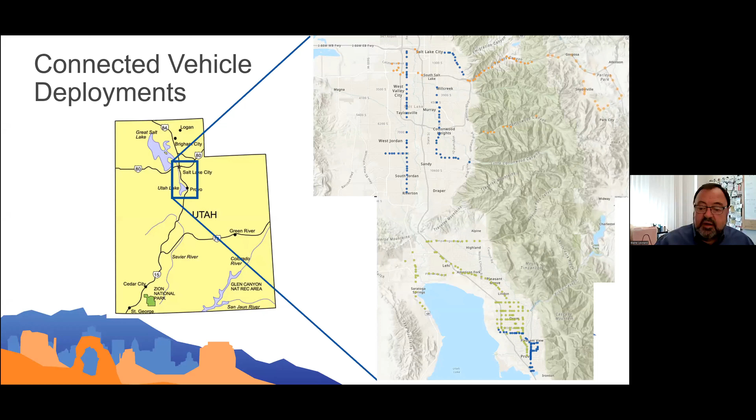So as was noted, we're going to focus today on traffic signal priority and emergency vehicle and snowplow preemption. If you've watched some of our earlier webinars, we've talked a little bit about our connected vehicle deployments in Utah. Here's an overall map that covers most of those. There's a few off the map to the north that I don't show here. We talked about this in some detail on webinar number 1. We've got about 340 roadside units deployed in about 270 vehicles.

As we've noted in earlier webinars, specifically webinar number 3, we started with transit signal priority. We didn't say, hey, let's do transit signal priority, how do we do it. We said we want to deploy connected vehicles, we want to be ready for the vehicles that are coming from the automakers. Let's deploy something - how do we make it useful to us in the short term? Transit signal priority was that feature, and so partnering with the Utah Transit Authority, that's what we built. The application was more straightforward than some, so we sometimes called it low-hanging fruit, but it also gave us some good short-term benefits, which enabled us to justify the expenditures and investment we were making.

Later today, Michael Sheffield will talk about some of the performance benefits and also the challenges with measuring those benefits with the data that we get from our connected vehicle system. We then expanded those deployments, and you see a bunch of other blue dots, corridors on this map where we expanded largely with both TSP and snowplow preemption. And again, we attempted to measure those benefits.

A not very scientific benefit was recently brought to our attention this past winter. On the very bottom of your screen, you see some blue dots that represent a corridor traveled by a bus rapid transit line. We had a very heavy winter in Utah with a lot of snow, and UDOT snowplow crews were incredibly busy trying to keep up with all the snow. We got record levels of snow. At one point, the preemption system along that blue corridor stopped working, and we heard about it through the region leadership there, so we jumped into a scurry mode very quickly to get that back up online, figured out what the problem was, and got it up and running.

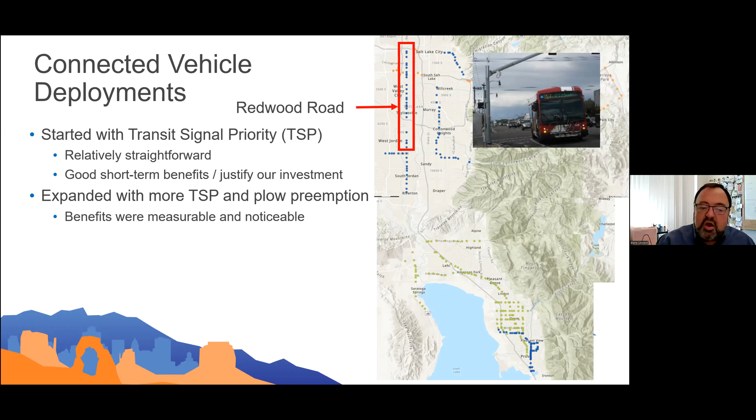Now, I realize that's just one data point and a bit apocryphal, and we wouldn't see that kind of benefit on every corridor, but measurable benefit is there for plow preemption on these corridors. And that kind of feedback allowed us to move forward.

And so we will talk more today about how we did those deployments. Renee, Philipp will discuss our efforts in expanding the use of data to evaluate bus idle times and fuel usage.

We'll again hear from Michael Sheffield about the data from that Route 850 and what we learned from that data. Hal Johnson from UTA will talk to us about their perspective of this priority system and how they plan to move forward.

Jonny Turner will talk a lot about the details of how this deployment is done. And I don't use the word details lightly. He's going to get into some details.

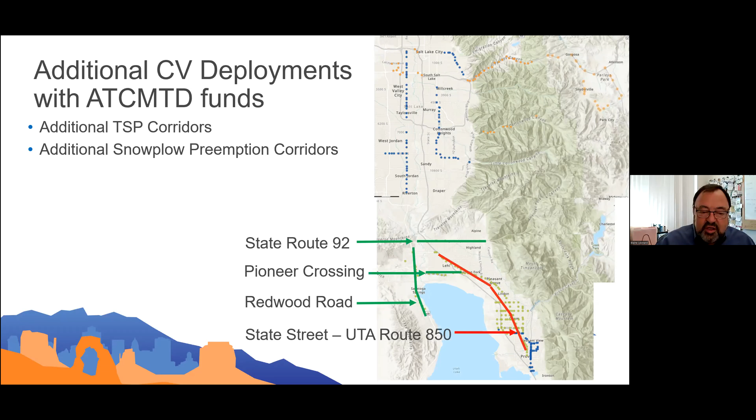And so those of you who are yearning for some details on the nitty-gritty things that are required to make this work, you'll enjoy that presentation.

We also had some additional technical capabilities added to our system as we worked through these deployments with these ATC-MTD funds. Security credentials, which I'll talk about here in just a minute briefly.

The integration of our data into Cirrus, which was discussed on webinar 2 largely, and the development of the RTCM message, which allows the GPS to be corrected. And Jonny will talk about some of that detail.

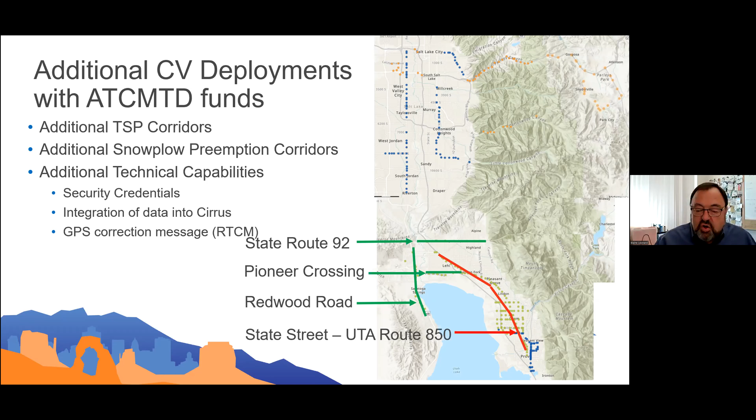And so we got a lot of benefit from these additional deployments. Messages through a connected vehicle system are transmitted in open air from an RSU or an OBU that's there, and

they're just broadcast broadly to any other compatible radio, RSU or OBU, that's there to listen to it. It doesn't go through a cell tower, as you know. It doesn't go through any kind of a central tower. It's an ad hoc message.

We call it sidelink, and it's there just radio to radio. There is a way of securing those transmissions, and during this set of deployments, that's what we started to do, was use digital security certificates to allow these messages to be transmitted securely.

We have three things that come out of this deployment of security certificates: message authenticity, making sure that the messages are only coming from trustworthy sources, and when you receive them, you can verify that.

Message authorization, which means that the message you're getting can only do certain authorized things, and message integrity, meaning that the message wasn't modified en route while it was being broadcast. So that's really important to us to make sure that our system has integrity.

We've attempted to follow national standards as we've done this. The primary standard that dictates these kinds of security credentials are IEEE 1609.2. That's the Institute of Electrical and Electronics Engineers standard 1609.2.

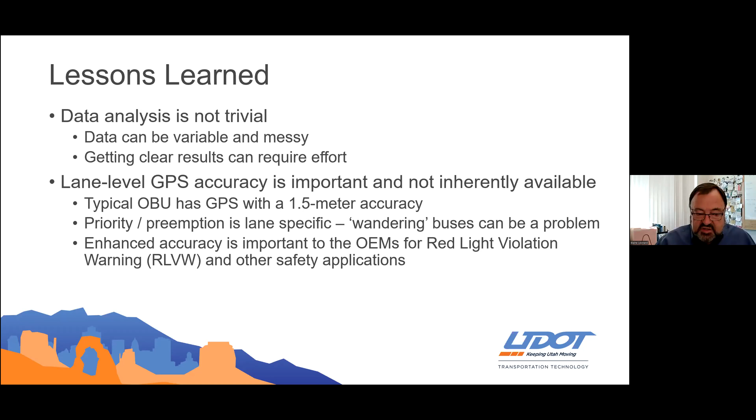Accuracy is even more important when we start looking at safety applications like red light violation warning and other things the automakers are working on. Jonny will talk about one of the solutions we've developed to the GPS accuracy issue using what we call an RTCM correction message. That's a lesson we've learned as we've worked on this.

Probably the biggest lesson for me as we've developed this system has been that, in a word, we end up with a TSP system that belongs to two different owners. I probably should explain that a little bit. The V2X system we deploy has been developed, engineered, deployed and is maintained by a certain group of people in our group here at the Utah Department of Transportation.

Traffic signals are operated and maintained by another group, by somebody down the hall and all of their maintenance people. We work together really well, with good cooperation, but our systems rely on each other, particularly the V2X system providing signal priority and preemption, which relies heavily on the traffic signal controllers.

When something doesn't work quite right, it's not just one team that has to look at it, it's two teams. Sometimes both teams say our part of the system is working fine, when in fact there's some little nuance that neither one of them sees until both teams sort of mesh together.

Our signal operations aren't really impaired by our implementation of V2X, but sometimes V2X can be impaired by the way we implement signal operations. We've had a lot of discussion about that, and it rolls into how we monitor and maintain this system over the longer term.

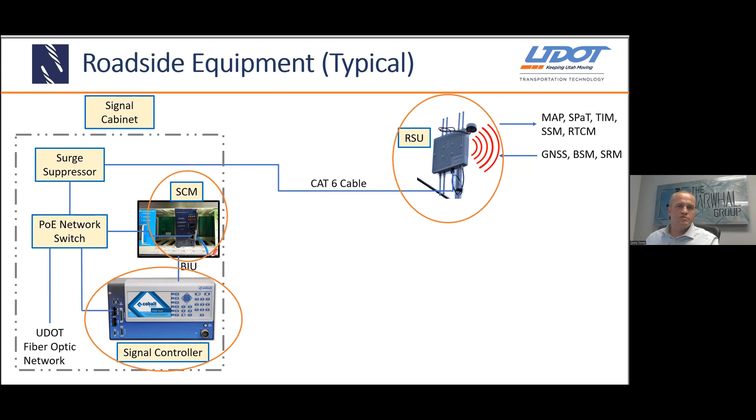So the physical installation of the RSU, we'll begin with it. We use some sort of standoff mount. In the case of the horizontal standoff mount, the purpose is to limit any interference from the luminaire extension to make sure we can get good wave propagation and coverage area of the RSU. In the case of the Astro-Brac, that's when we need to mount to a mast arm, typically due to overhead utility conflicts or places where there isn't a luminaire extension.

Within the RSU, there's a lot of configuration, and I struggled trying to share what configuration elements you need to know about. It starts from as simple as basic networking configuration, like you can see in this network configuration screen, but it extends through IFM message forwarding and SNMP and setting up store and repeat messages for things like TIM. The big takeaway I'd like to encourage here is to establish a really good relationship with your RSU vendor to get support, because it's almost impossible to write a comprehensive guideline on how to work with all RSUs. Each one's slightly different. For some, you may take it out of the box and the IFM may work just out of the box, while others you have to go in and turn everything on.

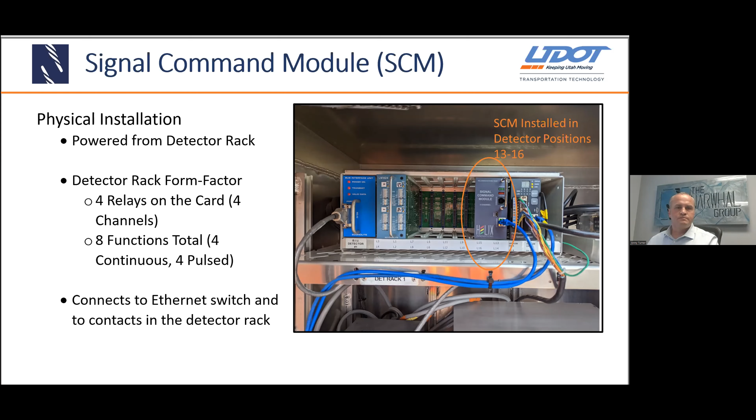So that's just kind of some of the configuration elements of the SCM. We'll step through these kind of quickly. You can rewatch the webinar if you want to get some more detail.

The first thing that we do is upload a map message, and in webinar 3, Chuck Felice covered a lot about map creation. We can support either the FHWA mapping tool or an Nmap file. That's the first thing we typically do, is we upload the map once it's created, and then we go through the configuration screen of the SCM.

We set up the network configuration, IP, subnet, gateway, the typical things, the SNMP user information for the RSU so the SCM can communicate with the RSU, and then set up the traffic signal controller information. What IP, for example, that we're getting the TSCBM, which is the traffic signal controller Battelle message, which we use to create the SPAT message in the SCM that gets forwarded to the RSU.

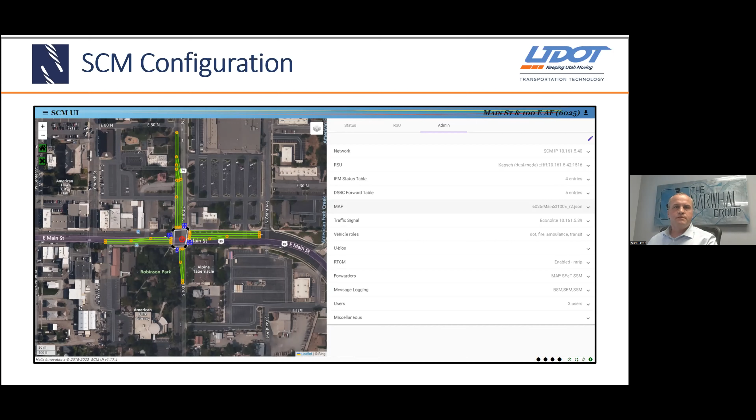One of the other primary items that we do within the SCM is that we set up the lanes and the vehicle roles for priority and preemption.

It's kind of hard to see, but you can see the different vehicle roles: DOT, fire, ambulance, transit. Within each vehicle role, we make assignments for the privileges that they have on a lane-by-lane basis. So for example, you can see that lane number 2 has a pulsed output, which is what we use for priority, and it's going to operate relay number 4.

And then that can be mapped clear through to the controller, and it can recognize, okay, when I see a pulsed input come in on relay 4, then I can implement TSP. And we'll talk about that, or I'll cover that here in just a moment as well.

So this is really kind of the critical element of making sure that the controller can be programmed, and it's really that tie between the RSU and the controller to make the operation work, and it's where the application's running.

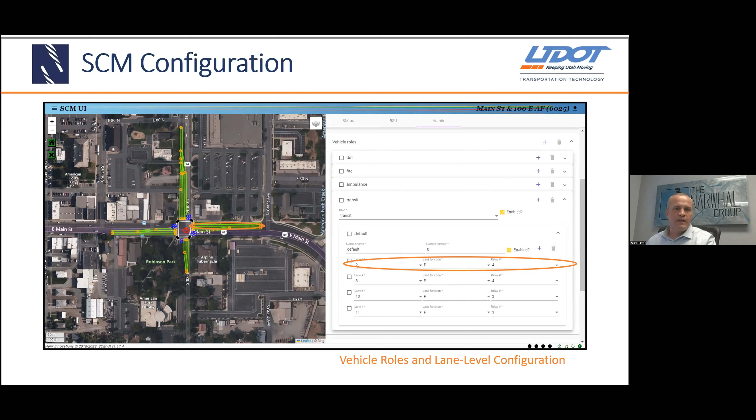One thing to know, as Blaine mentioned about the GPS drift, what we'll do common times is we'll assign all the lanes in one approach to help overcome some of those issues that we see when we see a vehicle drop out of the lane, because when it leaves the lane, it will cancel the request because it's not in the lane anymore. So we'll map all those approaches to help mitigate any GPS drift when we don't have corrections running.

Once the SCM's set up, then you can use the screen to do some data validation. You can see what's happening with SPAT, that you're getting all those TSCBM messages being created, and that you're generating SPAT and sending that out to the RSU. You can see the map message, and you can also see requests that are being made within the map boundary and the vehicles as they traverse the intersections.

In addition to that, you can see some of the other messages, and there's log files and different menus where you can see the BSM messages, the SRMs, SSMs. And you can also see on that screen that we've got RTCM messages that are going out, and we'll talk about that in a little bit.

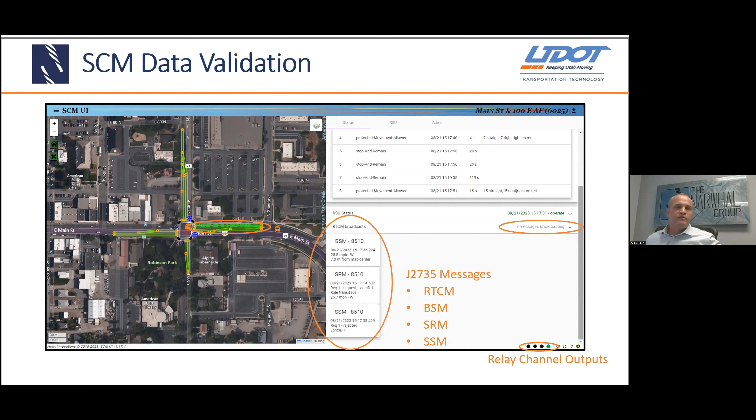And then also the relay channel outputs, so you can see in real time what relays are being commanded to the controller. That's super helpful for signal techs to know, okay, I can see these inputs going into the controller, they're live, am I seeing them, am I not seeing them? Sometimes we end up troubleshooting issues with the detector rack where, for whatever reason, an input's not working quite correctly.

So next we'll talk about the traffic signal controller. As part of this project, we didn't go out and replace all of the traffic signal controllers to get the latest, greatest, most connected vehicle supported signal controllers available on the market. There's some movement happening there, but there's thousands of controllers in the UDOT and state of Utah system, and it just didn't make sense to swap out controllers for some that may have some of those capabilities.

So like I mentioned before, UDOT and most of the other stakeholders use the NEMA TS2 style signal controller. And so there's a picture of a typical cabinet and the front panel menu of signal controller.

That's an Econolite Cobalt intersection, and there's both that and a max time view where we turn on the TSCBM. So like I mentioned before, with the RSUs, they all kind of vary. The same holds true with signal controllers. So when we go in and turn on the TSCBM, it's different for Econolite than it is for Intelight, and my anticipation is that it would be different for lots of different intersections.

Fortunately, Econolite and Intelight both support the TSCBM messages. There's some deficiencies there, and we're working through those, but they're available for us to use to generate SPAT.

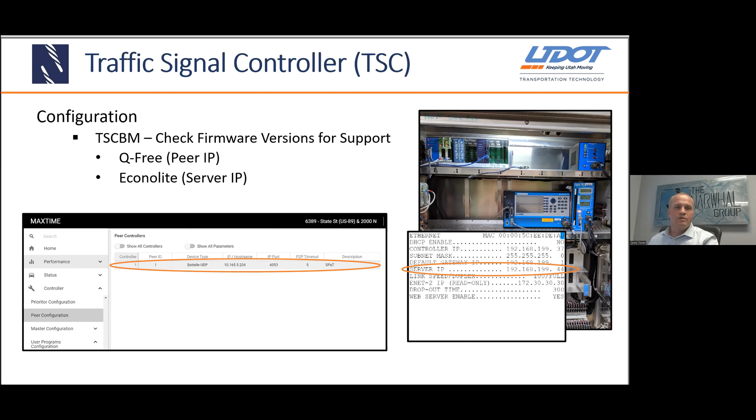And then in the case of max time, we enter those values. You can see that it says Battelle UDP, and that's what we use for SPAT, and that's built in, but you need to check the firmware versions of the signal controllers that you're using. If you're using older firmware versions, it's likely that you'll need to upgrade to a later firmware in order to be able to leverage using the TSCBM.

So additional programming that's necessary within the traffic signal controller consists of the detection and logic statements as well. Here's the screen in the Q-free max time controller where you can see the statements that have been made in the controller.

The variables are set, and you can see that in this case we have a pulsed input priority call going in on the very first line, statement number 1, and it's related to statements 13 and 14 where the TSP request and cancels are made. And so these logic statements are necessary in order to make the priority work in the existing UDOT environment through the use of the SCM.

Similarly, there's the configuration shown here for preemption. And so you can see that statement 2 is where we detect the values of preemption calls coming in, and then that correlates to statement 9 as well. So that's the Q-free setup.

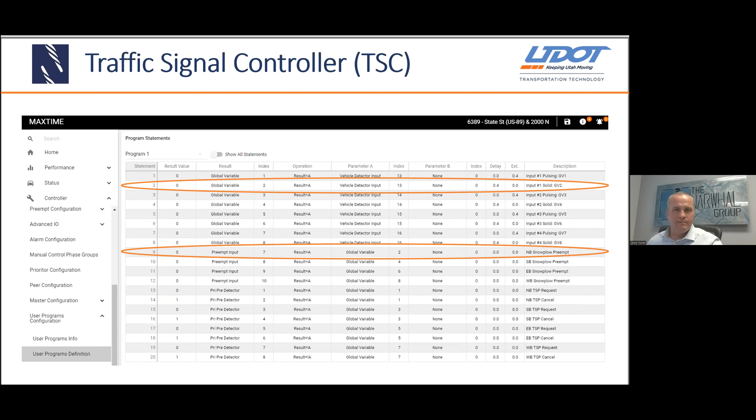The Econolite's kind of similar. If you're familiar with the Econolite front end, here's the walkthrough of it with its logic statements for both priority and preemption. And what's happening here is shown in the bottom right-hand corner.

So the first thing that happens when a vehicle goes into an intersection, whether it's a bus or a plow or emergency vehicle, is that call goes in, and it actually shows up initially as a pulsed input. First and foremost, even a solid input shows up as being interpreted by the controller as pulsed, and it has some wait values in here.

And so it takes 0.5 of a second for a preempt actually to occur. It immediately goes into priority and takes 0.5 of a second to go into preemption. And then when a call leaves or a cancel message is sent, it will take 0.4 of a second before the controller will actually fall out. So that's what you can see through that bottom right-hand corner of what's happening at the controller level.

So I know that's a lot. Hopefully that makes more sense to the traffic signal engineers and technicians on how to set that up. You may need to watch through that a couple of times, and there's some more nuances there and some, honestly, timing preferences that also depend on how you like to implement things, but there's some flexibility there.

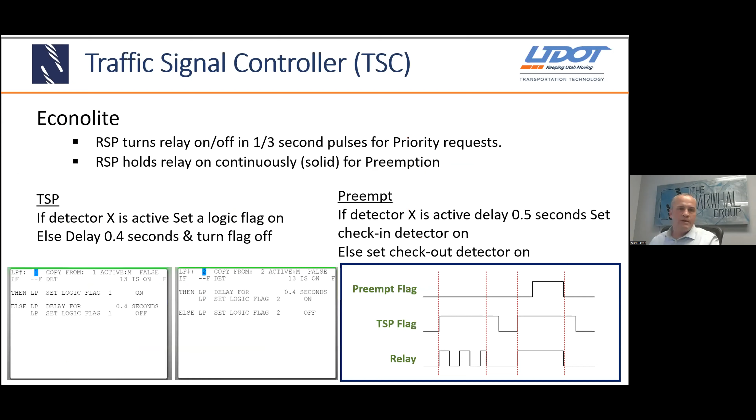Next, we'll jump to the onboard. So the onboard for the bus consists of the OBU, the onboard processor, the connection to the CAN, and the bus network. So like Blaine mentioned before, when it comes to certificate management, you have to have a connection to the internet. So in the case of the buses, there is a network connection to the internet that we can do over-the-air updates of the software or firmware on the OBU and OBP, and also we can do certificate top-off.

So that's kind of nice. We don't have to have a separate cellular connection—it was already available on the bus that we could leverage, and we have the ability to manage the OBU and OBP that way without any additional costs. So the physical installation of the OBU and the OBP, they go in the communications cabinet in the bus. Most transit vehicles have something like this, and it's readily available.

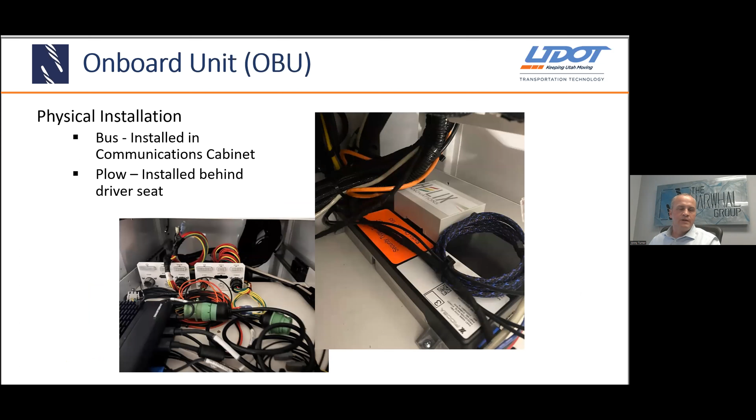Honestly, the configuration on board the vehicle is pretty straightforward and fairly simple in comparison to the roadside elements. And then, as Blaine mentioned before, we have the snowplow. For preemption purposes, this goes behind a seat.

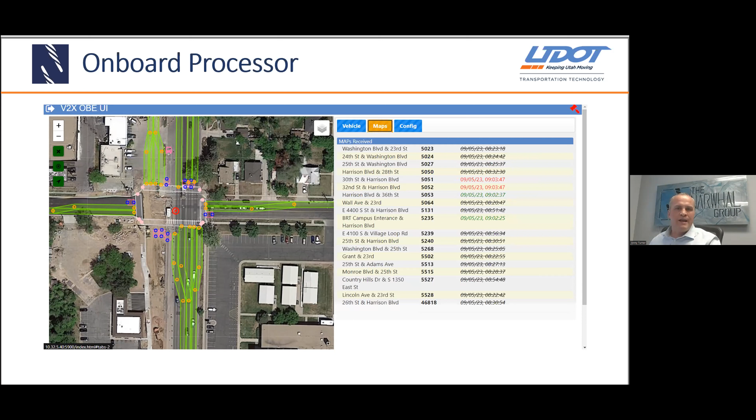This screen is just a visualization. On the left-hand side, this is what the screen looks like when it's received a map message, and you can see all the ingress and egress lanes, and the vehicle will place itself on that. In addition to that, it keeps a running list of the active maps, and they age out after a while, but it holds on to them for a little bit.

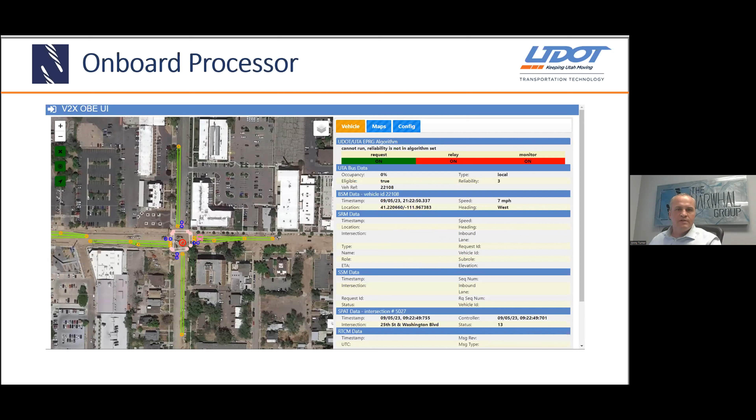Here's another display of the V2X display user interface, where you can see the bus data coming in, the BSM data going out, and the SPAT information being received. And then when a request is happening, the SRM and SSM fields are populated, as well as RTCM when RTCM is coming in. So you can see here the different values that are available in the vehicle itself.

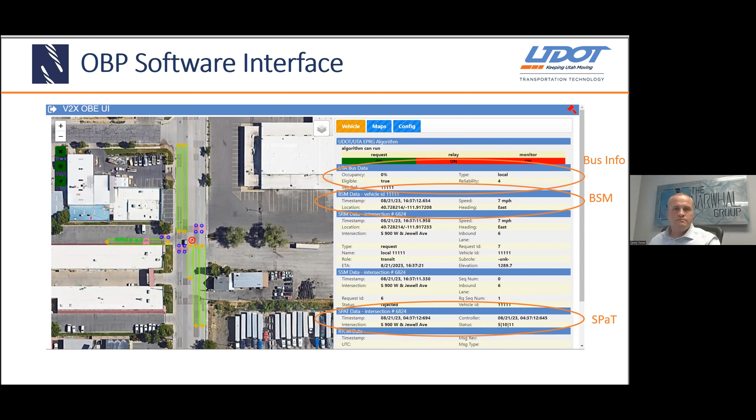Next up, we're going to talk about the RTCM correction. So as Blaine mentioned, the accuracy of the onboard OBUs is fine under some circumstances and for certain applications, but lacks in some others. So we took a couple of approaches.

We started off by going to the Utah Geospatial Resource Center. They already have an NTRIP server that's used for surveying purposes. So land engineers and land surveyors subscribe to this service to get RTCM corrections through their NTRIP server. There's some benefits about this system in that it doesn't require you to go out and set up a dedicated base station, and it leverages a whole network of base stations. So not only does it provide some failover benefits, but it can use a virtual reference station. So when you provide an actual GPS or GNSS coordinate of your location, it uses math and algorithms to determine, based on where you specifically are, using a mesh of base stations to give you your corrections.

One of the things it does require is a network connection to this service, and it's again based on a surveyor's type system. So it may have different outages when you think about it in the environment of connected vehicles, and for safety applications, when firmware or software updates occur for it, there's a need for a backup or a way to cover things. The other part is that it may not be scalable the way it is once you start talking hundreds or thousands of connections to it.

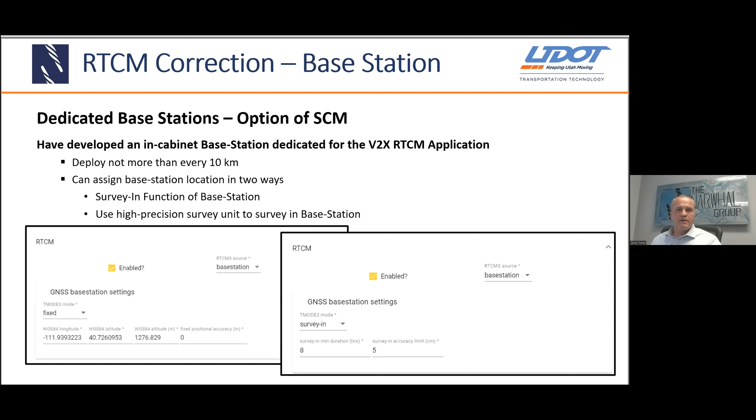This provides us a way to easily manage the GNSS, and we can deploy the OBP and on-vehicle equipment and get greater accuracy, and really validate whether this can be done in a connected vehicle environment. I believe we're one of the first ones in the country to have done this successfully. I'll caveat that we're using RTCM 3.2 because that's what the current NTRIP server supports, so we've standardized on that platform.

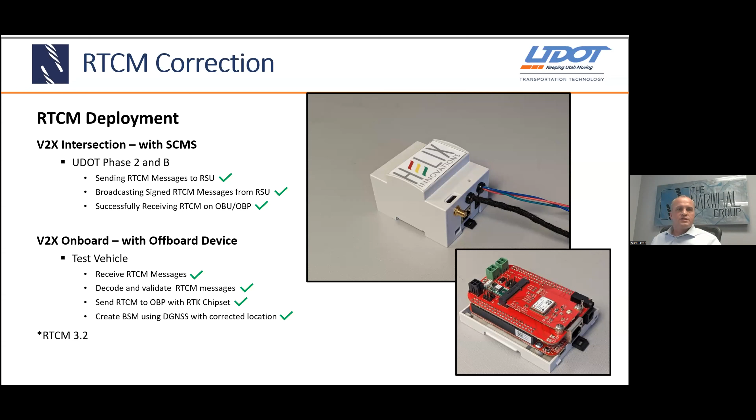Just to provide some background as we go through this validation of the GNSS, this is using a tool made by uBlox called uCenter, where we can see the different satellites in the sky, and we can make an NTRIP connection.

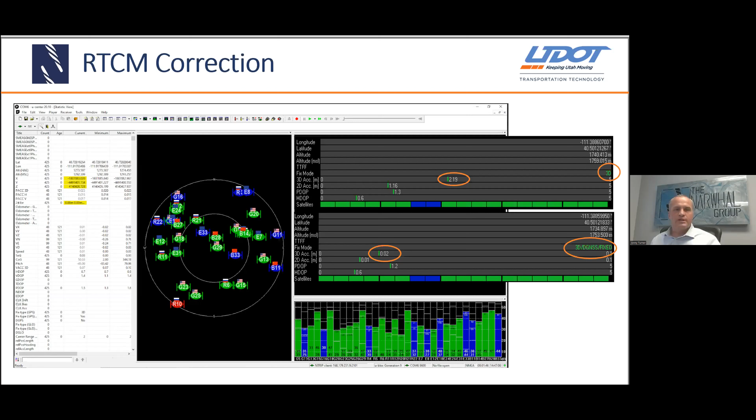You can almost make it out at the bottom - we have a connection to the NTRIP server. To give some idea, this shows a 2.2 meter accuracy at the top, and once we have that NTRIP connection, we're down to 0.02 meter accuracy, which is 2 centimeters. It shows we have DGNSS, the differential GNSS, with a fixed connection - those are some of the elements of the correction.

I know there's a lot of content there. You're welcome to watch the webinar again or reach out to me with any questions. Appreciate it, thank you.

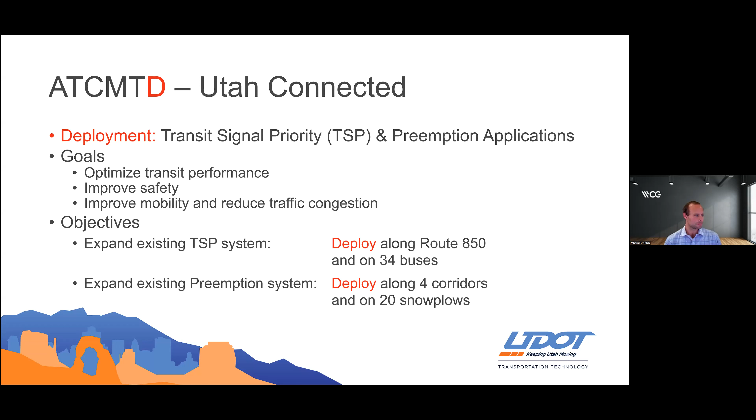So for Route 850, just a little background: it's about 18.5 miles long. It travels along one of the primary major arterials in the area, and it's an alternative north-south route to the adjacent parallel interstate, I-15. It can be quite congested, have lots of traffic. The AADT along Route 850 varies from 15,000 all the way up to 50,000, so quite a bit of traffic and movement there. The bus route operates at 15-minute headways, about 62 trips per direction per day, and the average daily ridership is about 2,400.

With the snowplow preemption, in total it's about 31 additional miles with these high priority corridors targeted. These are some of the heaviest traveled, highest volume roads in the area, and these were the ones that the UDOT maintenance team identified as priorities.

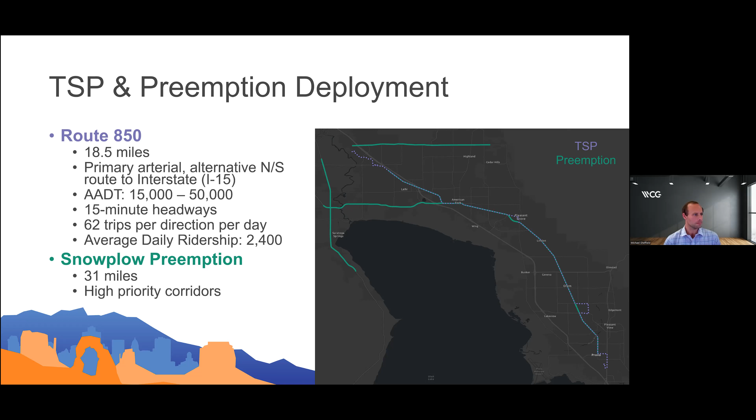With preemption, it's a little different in how that gets enabled and set up with the signal controller and at the intersection. With TSP, transit signal priority, it's a little bit different, and it has to be decided how much green time can be allowed when TSP is requested and served. So UDOT developed a guidebook, some guidelines for how to do this.

In the past, there was a lot of manual effort. It was really subjective, but these guidelines help the signal engineers do this in a way that isn't quite so time consuming and helps them in this process. It's important to note, however, that this is a guideline to support engineering judgment when implementing TSP. This isn't a UDOT policy, this isn't what has to be done. This is just a way to help the signal engineer.

The goal is to provide as much green time as possible to these buses. We recognize the importance they have in the transportation network, and how if they can improve their performance, their travel time and their schedule adherence, they'll become more attractive alternatives. So we want to provide as much green time as possible, but be careful so that the conflicting phases, the ones where green time is taken from to provide the bus, are able to recover within a few cycles.

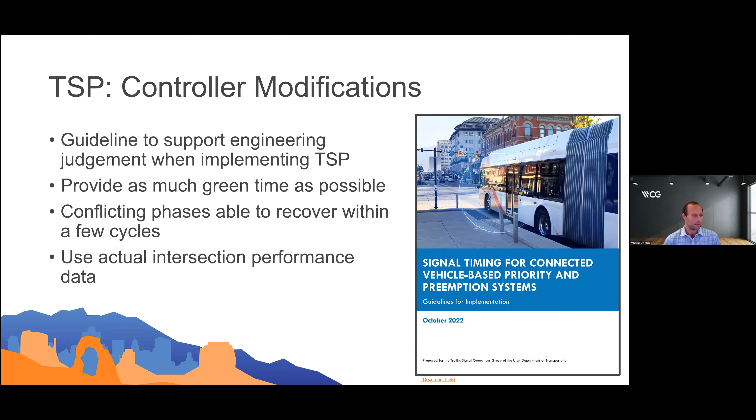So we turn to the ATSPM split monitor report, the automated traffic signal performance measures. This split monitor report was used partly because it's available at nearly all intersections where we have the detection and have that integrated.

Also, that split monitor report summarizes why phases end. Do they force off, meaning there's so much demand that it finally gets to a point where they have to force it off and go to the next phase? Does it gap out, meaning there's a lull in demand and it does not need the entire time programmed in the controller? Or does it skip, maybe there are no vehicles, often seen in left turn lanes, where if there aren't vehicles in that lane, there's no need to give it the green arrow.

So the data that went into this process was from the existing timing plans, the split time and the min time, meaning the min green plus yellow plus red. And then from the split monitor report, these remaining 5 values were obtained: the 85th and 50th percentile splits, meaning how long did the phase last and what was the 85th percentile of that duration, and then the percentage of time that a given phase was forced off, gapped out, or skipped, and the split time, the duration of each phase.

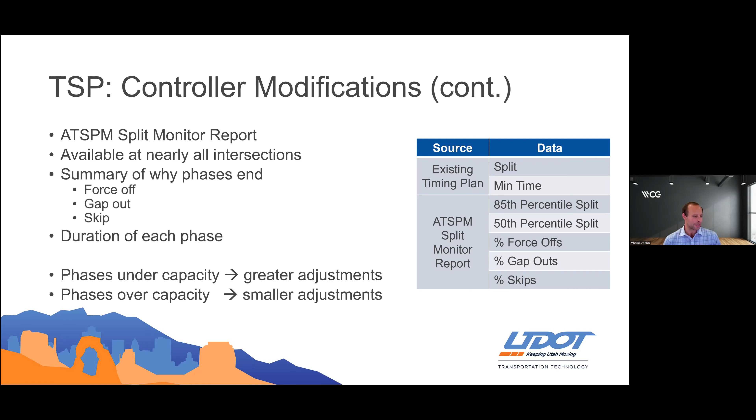We're going to walk through a decision tree that helps us calculate exactly how much time is recommended for TSP. A couple of definitions: TSP max means the max amount of time that a phase can be shortened when serving TSP. The acronym PS you'll see as program split, and then min time is the minimum green plus yellow plus red for each phase.

So starting on the left, is it okay to modify signal timing at this intersection? Yes or no? There are cases where we may not want to modify timing, maybe an intersection off-ramp. A backup of a queue is acceptable, of course, but if that queue is backing up onto the main line of the freeway, caution should be observed.

But if it is okay to modify signal timing at an intersection, you collect the data from the split monitor report and other sources, and then the question is, are skips greater than 70%? In other words, is the phase being skipped 70% or more? If yes, then it's basically the maximum possible, and you take the phase split, the program split minus the min time, and that is how much this phase is recommended to be shortened.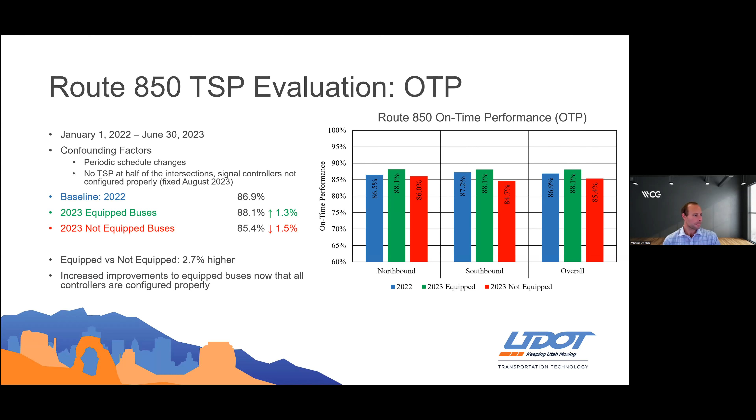Now, when we look at travel time, this is the total route travel time, so from when a bus begins to when it ends. On average, this is the chart that shows the comparison versus northbound, southbound, and then overall.

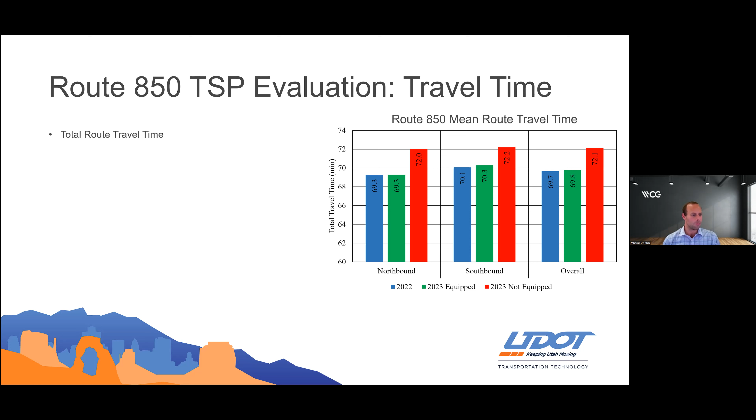Here it's even more important to recognize the difference in 2023 between the equipped and not equipped, having that control group. If you just look at 2022 versus 2023 equipped, the blue versus the green, you see an increase of 0.1 minutes, about 6 seconds in total travel time.

That may not be the expected or meaningful benefit. But there was obviously something inherently different in 2023. Maybe increased ridership, increased congestion, or something else caused the total travel time to be worse, which is readily apparent with these not equipped buses. It's a 2.5 minute difference.

Directly comparing the equipped and not equipped, the equipped buses were 2.4 minutes faster. So that's quite a bit. As a rider on transit, a passenger, that adds up, and is certainly a meaningful improvement.

Again, we expect this travel time to improve, especially as the percentage of not equipped buses goes down as additional deployments are installed.

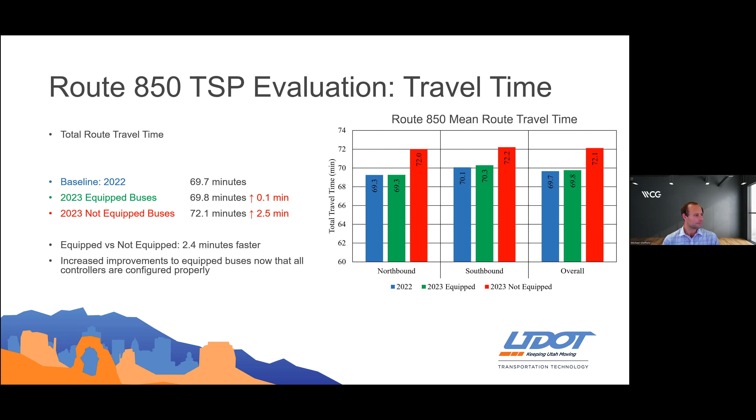So some lessons learned, briefly: post-deployment system monitoring is critical, even if you've done it before. We've deployed TSP on several routes before and thought we had the process down, but through looking at it in additional detail we were able to see that it's not quite working as expected at some intersections, and we were able to fix that.

Also noting that the experiment design isn't perfect. Real life operational differences pre and post deployment exist. This isn't a simulation where you can control every single variable except the one you want to change.

The control group, those unequipped buses in 2023, helped us account for some of those confounding factors and identify what the difference is between equipped and not equipped in 2023 - something that wouldn't have been apparent if every single bus in 2023 were equipped.

Finally, meaningful transit improvements are observed, and these vary by route. These findings don't match routes where we've previously deployed, but in all cases meaningful improvements were observed. While some of the long-term benefits of connected vehicles are still awaited, these are tangible, real benefits that can be provided to our transportation system.

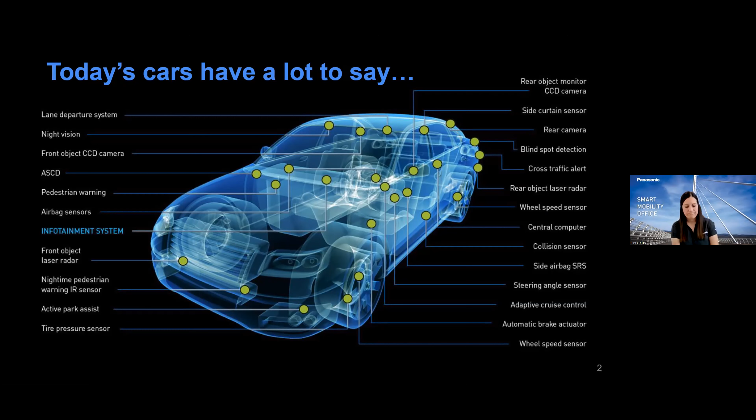So to do that, I want to start out with a visual aid of a digital representation of a traffic intersection on the current Utah deployment. This is particularly located in Orem City along a transit bus route. What you see here is a looped video from last week, so this is not live, but of a transit bus that is traversing an intersection. As it's traversing that intersection, it is making a request for signal priority to traverse that intersection more quickly.

Now, this is currently visualized in our Connected Intersection Manager application in the Cirrus by Panasonic product. Connected Intersection Manager essentially allows users to monitor their connected intersection applications, as well as related hardware devices that are installed in the field.

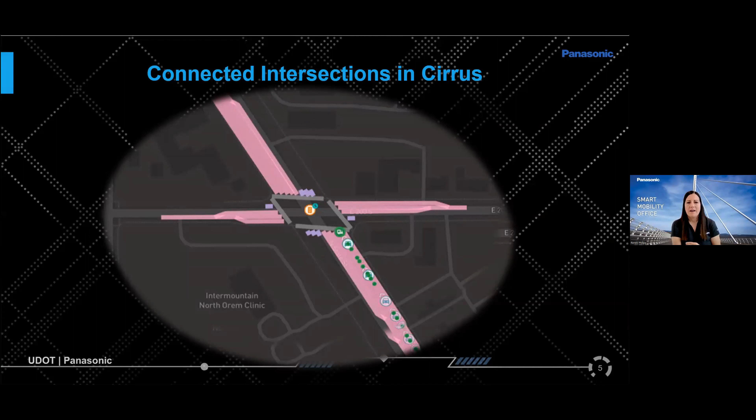First and foremost, what makes this possible is not only an awesome team of software engineers, cloud engineers, product designers, product managers, owners, I could go on, but really the crux of this is a lot of that V2X data that you've heard about up to this point. I'm going to go in detail one by one just to describe it for you from this digital footprint.

So let's start out again with just an overview of that map data. Map data is a digital representation of an intersection. So what you will see contained in this map message or map data is information that characterizes an intersection. We can start out with something like an ingress lane or an inbound lane into the intersection, and that's depicted here in pink.

We also have egress lanes where you may exit the intersection, and that's shown here in purple. Then also we have other features of an intersection like a crosswalk or a bike lane. And then we can also infer where a conflict zone is within this intersection, and that's going to be, in very lay terms, that box there in the center.

So what's really important about map messages and what allows us to make this digital footprint is that we have data elements that speak to a reference point and nodes that come off that reference point that speak to a distance. So we can start to build out these polygons again and make this digital footprint that you see here. This map message is also very critical for a lot of the connected intersection features that we'll talk a little bit more about today.

So diving a little bit deeper, what's visualized here is also BSM data. BSM data, just as a recap, is showing what's happening in a vehicle on the roadway. That may be things like, are the headlights on, or is traction control activated. But as Blaine had mentioned earlier, one thing you will not get from BSM data is identifiable information. It is all anonymized, and there are great measures taken to make sure that you cannot track a vehicle. You will not know its VIN, make, model, owner, or even long-standing traversals of where it's going.

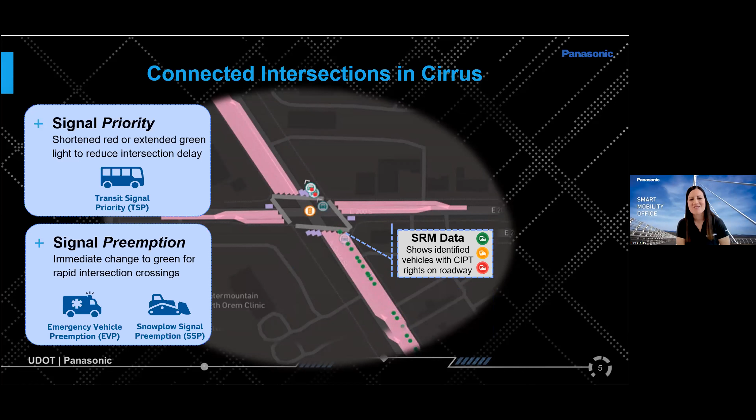This is reserved mostly for emergency vehicles like fire trucks and ambulances, but as you see there as well, snowplows have this privilege as well.

So let's back out. We've talked about map data, BSM data, and SRM data. I want to note that some of the data contained within a BSM or an SRM is really enriched by CAN data, which is controller area network information. What's contained in CAN data that can get put into a BSM or SRM is essentially things like the gear position of the vehicle - is it in drive, park, or reverse? You may obtain speed data from here as well, and other things like wiper status.

Wiper status is something that had come up in one of the previous webinars as a data element that can be used to identify other vehicle events happening on the roadway, maybe as it relates to a weather event. So you may have weather data that's brought in, but you can couple that with wiper status to maybe infer that it's raining outside.

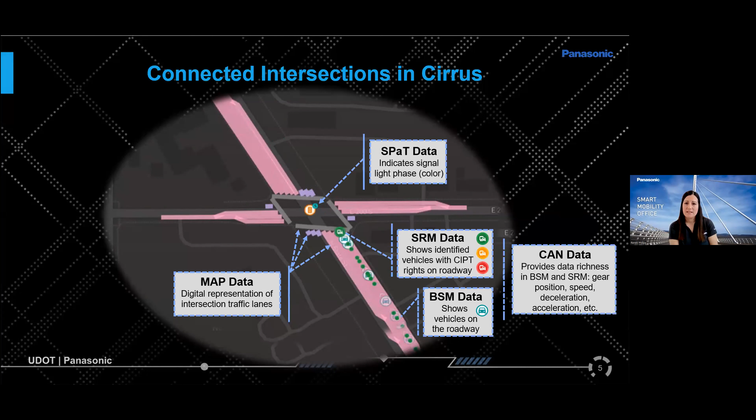The last data message I want to call out here is SPAT data. Jonny talked a little bit about this - it stands for signal phase and timing data. It essentially indicates the signal light phase, the color of the light, so green, yellow, red, and then the duration of that, if it's green for 5 seconds, 10 seconds, whatever length of time.

What's really interesting about SPAT data for this deployment and for some analyses I'm going to talk about in just a moment is we're using this as a way to infer how that signal request message, that SRM, was processed - whether it was granted or not granted. So if a bus is approaching an intersection and makes a request to get priority, we'll go look at the SPAT data to say, was there a disruption to that signal phase and timing that would be indicative of that request being granted. I'll get into a little detail at a subsequent slide to talk through the high level logic of what we're doing there.

But before I proceed, I want to take a pause and quickly poll the audience. There'll be a question that will pop up in just a second, but I want to preface this with - we realize this is a mixed audience on the call. Not everyone may be traffic engineers, familiar with traffic intersections, or even traffic signal data. But for those of you who are, we'd love to see your response. And if you feel like you don't have any information, feel free to select the last option. The question is: what data do you use most often to determine if there is a timing disruption to a typical signal phase? So if that signal phase is typically 5 seconds green, how would you determine with data if it actually was disrupted and was longer or shorter? Would you use SPAT data, some of the data I was just describing, might it be ATS-PM data, some other data source, or perhaps you're just not familiar with traffic signal data.

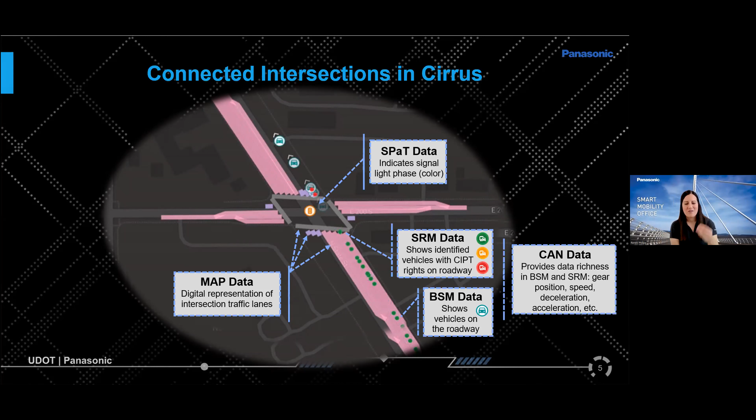So let's go ahead and move on. Let me get my clicker back right. All right, so we're taking all this data, and now let's dive into how we're using it to measure key outcomes for connected intersections. There's a whole host of metrics that we've identified in studies about how we might go forward with measuring those outcomes, but there's a couple I do want to share with you today, as I alluded to early on and Blaine had mentioned at the forefront. This is going to be stuff related to air quality.

Now, air quality is somewhat hard to define, so I do want to say that we are taking interim steps and looking at inputs into air quality.

So that is vehicle idling events at intersections, and we're also taking measurements or estimates of fuel consumed as it relates to those vehicle idling events. The reason for our selection is twofold. One, air pollution is a hot topic today and something Utah is contending with, and we think these are inputs to that. Secondarily, some of this priority preemption activity at intersections is something we think could help reduce air quality emissions.

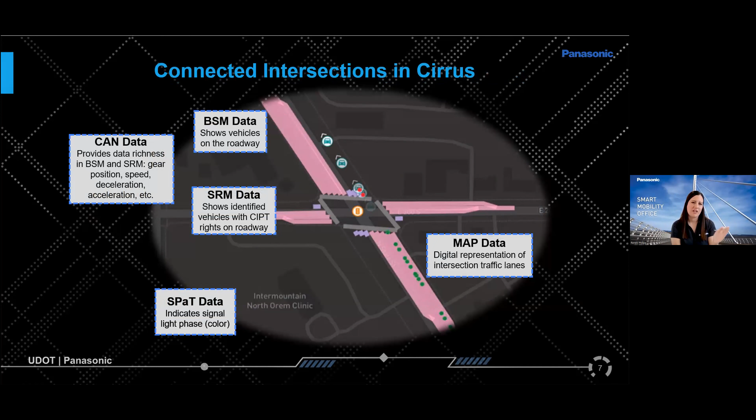So with that, I want to go back to our data elements we just discussed on that digital representation, and show you how we link these different message types and data elements to identify certain vehicle events happening on the roadway. Again, I'll be talking about vehicle idle events and then fuel consumption.

So for vehicle idling, how do we identify that? Most of the data for this is coming from BSM data and CAN data. I'll throw up the parameters we're evaluating. First, the vehicle needs to be on, sending BSMs. Its gear position needs to be in drive, not reverse, not park, but drive. And then the speed needs to be 0 miles per hour. So essentially that car is on, it's in drive, and it's not moving.

And then we also take the latitude and longitude point for that BSM, and we map that to the map data to understand whether or not that idle event is actually happening in the intersection. We do that by checking whether that lat-long sits within an ingress lane, an egress lane, or a conflict zone. If it is, it's an idle event in an intersection.

And then we also pull in vehicle role from the SRM data. This is very high level - it'll just tell us if it's a transit bus, snow plow, emergency vehicle, something along those lines. The reason for this is because for a vehicle to send out that request, we need to know it's an eligible vehicle. So we do get some identifiable data, but I want to make clear it's still anonymized - we're not able to track, so it doesn't violate any of those standards you'd see for a BSM.

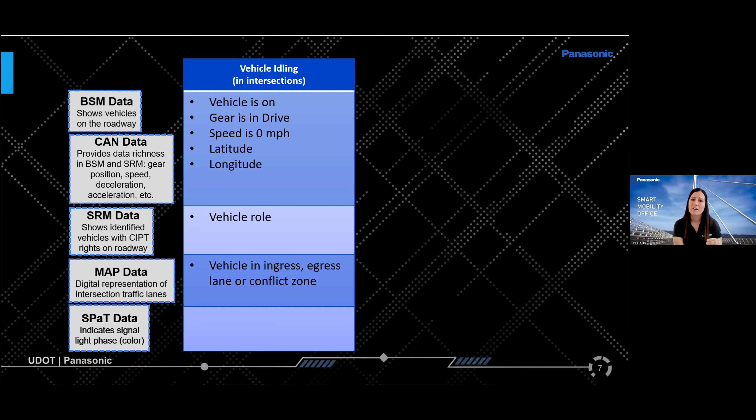But we will use that vehicle role in working toward the next metric, fuel consumption, because fuel consumption can vary significantly based on which vehicle we're evaluating. So let's move over to fuel consumption. What we're doing is taking that vehicle idle event and calculating the duration of it in seconds. Once we know how long a vehicle is idling, we layer on top of that fuel consumption information pulled from the Department of Energy's website. They've got a table that provides rough estimates by vehicle type of how much fuel is used if that vehicle is sitting idle for 1 hour with no load.

One quick example of this is a transit bus - if it has no load and is idling for 1 hour, it uses just under 1 gallon of fuel. So we can easily take that, multiply it by the idle time we calculate for the idle events, and get to a fuel consumption factor.

All right, so with these events described, I want to briefly go into a description of the data and then show you some of our preliminary findings.

So you've seen this chart many times - I won't belabor the point, but I want to use this as an illustration again of the data included in this analysis. We're looking at that deployment region for phase A and phase B, primarily situated around Orem. Zooming in, you can see it includes an 11 square mile area of Orem City proper located there in blue, and it also includes some key corridors that extend outside of Orem to include snowplow routes and transit bus routes.

This is just a quick illustration of some of the vehicles traversing this area. There are about 75 public works vehicles included in this analysis, a mix of snowplows, transit buses, and emergency vehicles, both ambulances and fire trucks. And we're including about 130 equipped intersections that they could be traversing through or having idle events in.

We're looking at about a 6-month period of time that starts with October 2022 and extends to March 2023, so really from the beginning of the deployment to ceasing at an earlier part this year. With that, let me dive into some of the baseline findings we saw through the analysis.

Starting with vehicle idling events, there's a lot going on in this chart, but first I want to point your attention to the green vertical bar chart. This represents the number of idle events happening each day across that 6-month period. As you can see, as the deployment was coming online, the number of idle events was fairly low. But once we hit that final installation date, with everything equipped and running in the field, we saw quite a bit of an uptick in the number of idle events.

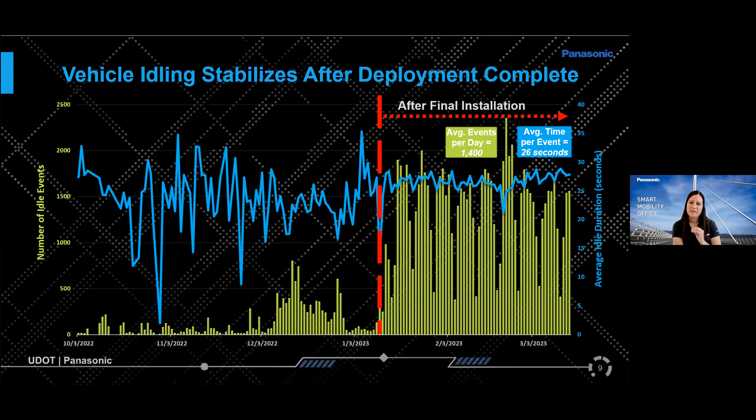Next, the team took this information on vehicle idling duration and converted it into a fuel consumption factor. The average duration of an idle event is 26 seconds — relatively short. If you equate that into a fuel consumption factor, it ends up being about six one-thousandths of a gallon consumed. Very, very small — I stumble over it every time I try to say it.

So what we wanted to do was take that to a larger scale to make it more meaningful, estimating it at the daily level. With 1,400 idle events happening each day in this deployment, that equals about 8.5 gallons of fuel consumed during those vehicle idle events. Again, not a large number, but as this technology scales and we get more vehicles out operating, there's definitely potential for that fuel consumption factor to go up. It speaks to a greater potential to look at ways we can mitigate and reduce it, potentially through greater mobility through those intersections via priority or preemption.

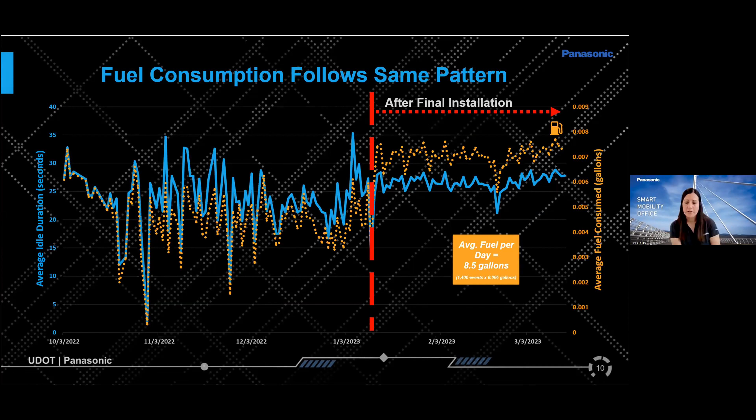So where do we want to go next with this? We have intentions and have started on deeper dives into idle and fuel data. We want to look at key segments of what's happening with priority or preemption to speak to its efficacy in terms of interim measurements of air quality. The first one up is bifurcating the information to look at whether there's a difference in idle events, duration of those idle events, and fuel consumption for granted requests for priority preemption versus non-granted requests. We believe there is, but we need to test this with more thorough data.

So we're looking at: does idle decrease? Does that also lead to fuel decrease? We think there's a fairly straightforward way, at least as a preliminary stab, to convert a lower fuel reduction into an emissions factor. We've been speaking with some industry experts on this front, thinking about how we could convert this, and it seems like there's an opportunity to at least start out with carbon dioxide emissions to get to an efficacy factor there.

One thing I want to return to quickly — we talked about SPAT data at the forefront, and I was asked how we look for time disruptions to signal data. In this deployment, for these analyses, we're utilizing SPAT data. To describe that a bit more: what we're essentially doing is taking the point in time at which a signal request message is sent out at the intersection, say by a bus, and using that as a starting point, then back-analyzing 30 minutes to look at the average signal phase for that approach and getting a value from there.

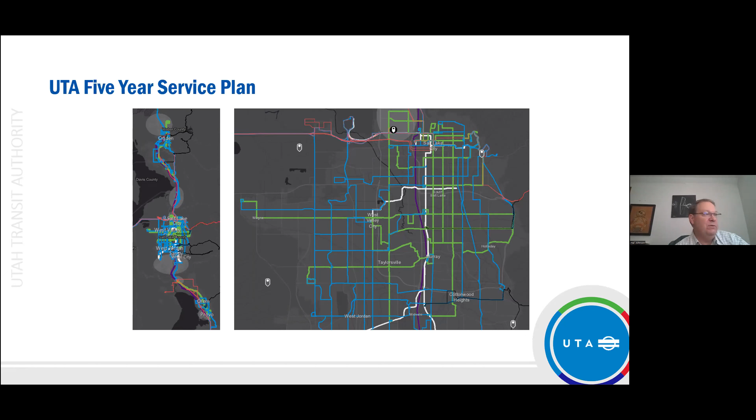So UTA is a multimodal system. We have light rail, a 50-mile light rail system, a 90-mile commuter rail system that links our city centers. This map shows our 30-minute and 15-minute bus networks. The green lines are the 15-minute bus networks. So we're very multimodal, and we try to serve the right transit market with the right tool.

One of the things that's really important about focusing on bus on the TSP side is we see our customers on the bus side tend to use the bus more frequently, so they use it 5 days a week more often than our rail system. They use it for not only work trips but non-work trips, as their primary mode of transportation. They tend to have lower incomes and more are minorities. So providing more TSP helps with equity.

We've seen studies in other cities where they've seen between a 4 and a 15% increase in travel speed in the corridors, reduced time. We've also worked with UDOT on route 217, our Redwood Road service, and saw pretty significant increases in reliability as well as less schedule variability.

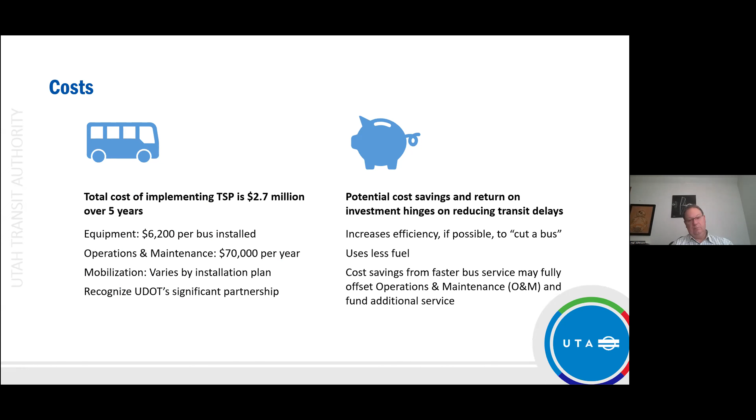One of the big benefits we hope to see from this implementation, in addition to the customer benefits, is that a typical 10-mile route will have 8 to 12 buses out on the system at any one time. If we can take a bus out of service or remove a bus from the route while maintaining the headways, that's a real significant benefit to the transit agency, both by reducing the capital cost of procuring buses, and because we have a difficult time finding operators under current labor conditions.

So the other goals we're working toward are really improving our customer experience and increasing reliability. We're looking at our performance measures garage by garage. We operate buses out of 4 different garages along our service area, so we'll look at how the deployments go in each garage.

We're doing this in cooperation with UDOT, using their traffic signal system. The current focus is on our bus rapid transit routes as well as our core routes, the ones I showed you earlier that have greater than 15-minute service.

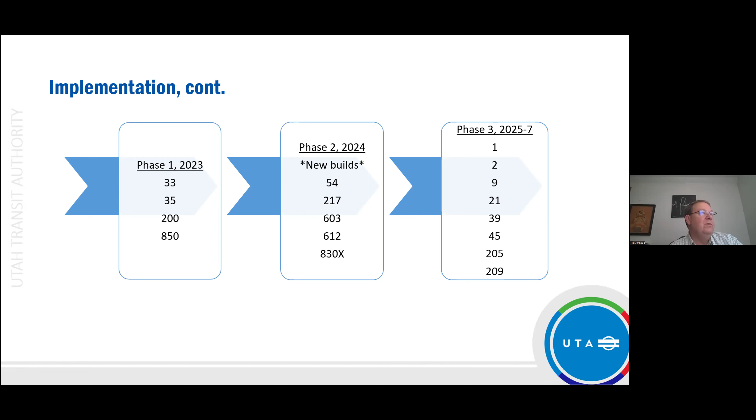So these are the routes that we're targeting in '23. Route 33 and 35 are one long route connecting east-west, 850 and 200. In '24, we're looking at 5 additional routes, and in '25, '27, we've got 8 more routes on the list. These are all our highest ridership, most productive routes, representing probably 50% of our bus ridership, so improving them will be key to improving the overall bus system.

In terms of impacts, we want to minimize effects on cross-street traffic, have a positive impact on safety and air quality. One of the big things important in Utah is that we have a lot of collaboration and cooperation among agencies. We have a great partnership with UDOT, the MPOs, and our cities and counties, so we're fortunate to have such good working relationships to implement this kind of technology cooperatively, benefiting taxpayers and system users.

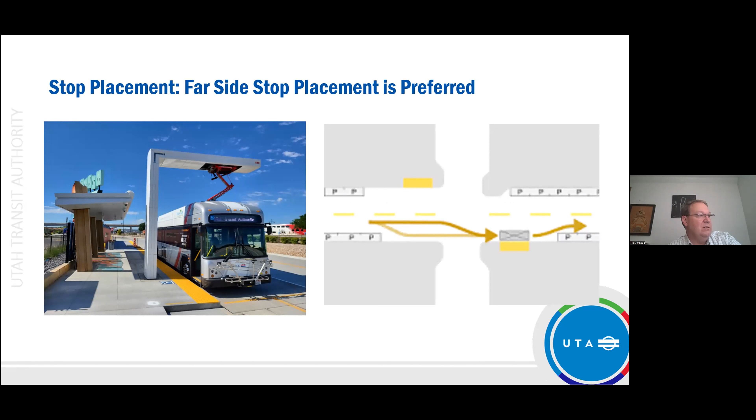I did want to mention one thing quickly: the placement of our bus stops is really critical to making TSP work. We want to focus on getting far-side stops into the system. The picture on the left is of our Ogden bus rapid transit project that just opened last month. That's all of my slides, and I'll stop there.

That sounds great. Thank you so much, Hal. It's nice to get those additional insights about what UTA is doing in partnership with UDOT.